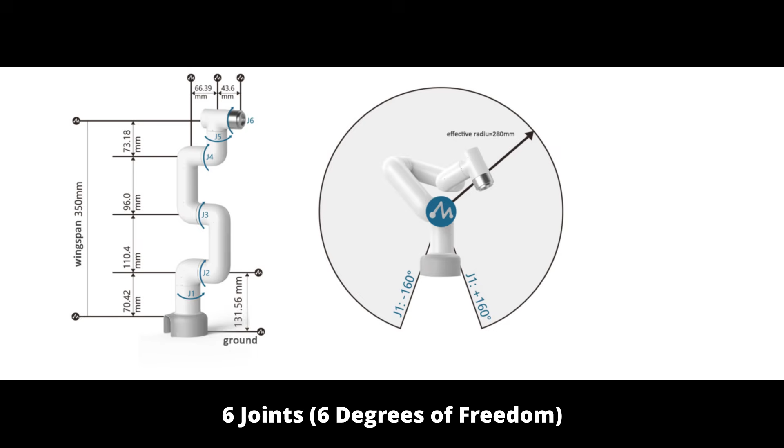So you want to pick up a cup. Here's how ROS2 control makes that happen. Let's look at just a standard example, picking up a cup. So the first stage is your program's command - you want the arm to move to pick up the cup.

Your program, typically in ROS2 that's going to be MoveIt, will calculate the positions of each joint. It'll calculate all the positions each joint needs to move through to get the gripper from the starting location to the goal location around the cup.

Your program then sends what's called a joint trajectory - think of it as a list of positions for each joint, in radians. This joint trajectory gets sent to the joint trajectory controller, which is part of ROS2 control. For example, it might say joint 1 should move from 0 to 45 degrees - I'm using degrees because it's easier to understand than radians - joint 2 should move from 30 degrees to 60 degrees, joint 3 should go from 20 to 10, and so forth.

So that's what happens right here - that's where it all starts. Your program, MoveIt, will calculate all the positions that each joint needs to go through to get the gripper from the starting location to the goal location, which is right where that cup is. That's called the joint trajectory, a list of positions.

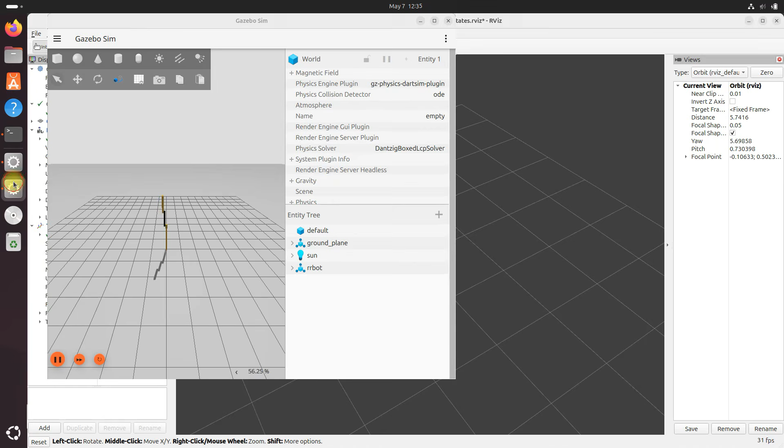Okay, so let's Control C. Let's check out another demo. So let's do ROS2 launch ROS-Gazebo sim demos, and then do joint states.launch.py. Let's press enter. You can see right here another simulation for a very primitive robotic arm. And now when you run each demo, you can see the topics and explore by doing ROS2 topic list. You can see the different topics right there.

All right, let me just show you something. I'm going to open up Firefox. Let's go to Google. I want to show you where you can find some other demos. We'll go to github.com/gazebo sim/ROS_GZ.

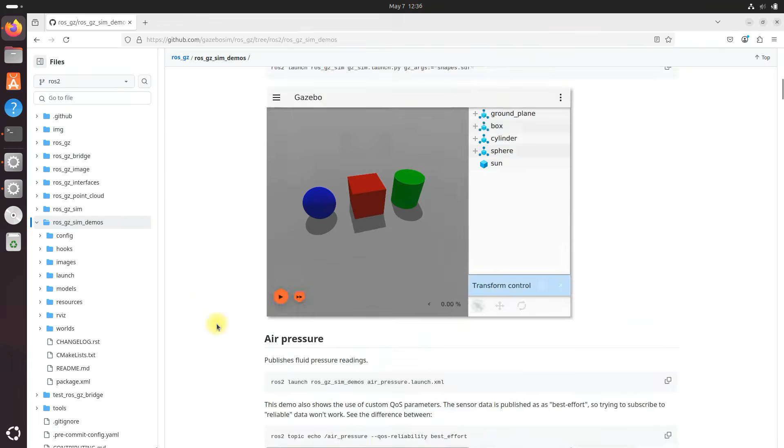Let's go to ROS-Gazebo sim demos. And right here, here's the URL. You can find all the different demos that you can run. Many, many, many different demos. So you're not just limited to the ones that we just did here.

All right, let's close that out. Control C. Let's run a gripper example. We can do ROS2 launch Gz_ROS2 control demos, and do gripper mimic joint example effort.launch.py file. Press enter. Let's see what we get.

Okay, so I see we've got an error in here, but it seems to have loaded just fine. Yep, everything loaded just fine.

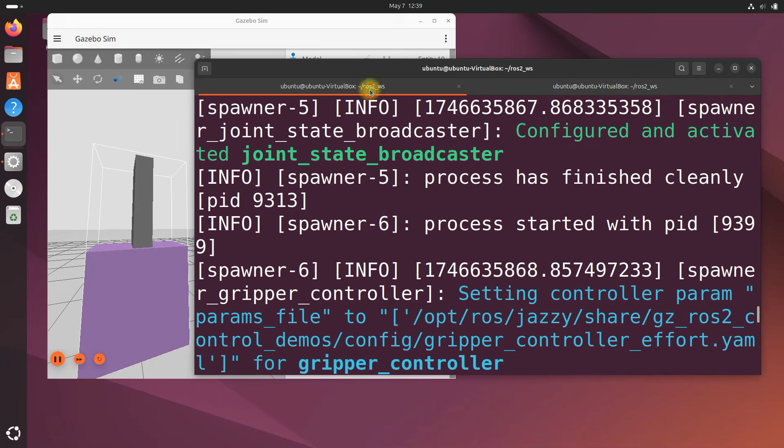Okay, clear. Now let's try the differential drive mobile robot example. So we're going to do ROS2 launch Gz ROS2 control demos, and diff drive example.launch.py. I went by that command really quickly, let's go back so you can see it. So ROS2 launch Gz ROS2 control demos, and then diff drive example.launch.py.

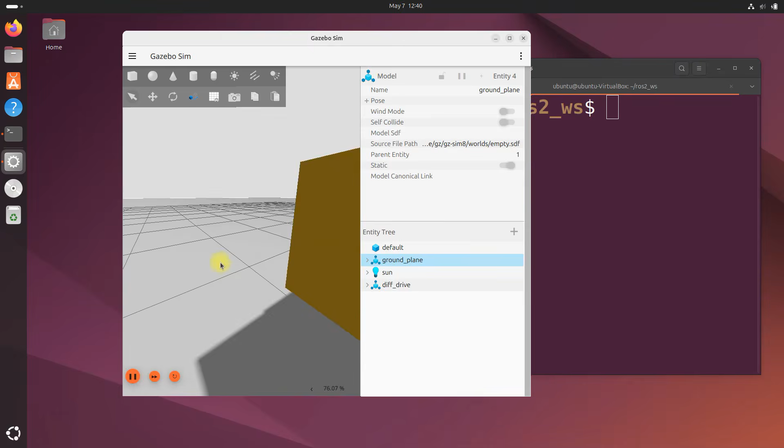Okay, let's clear, I want you to see the robot. There it is, in all its glory. Use the middle mouse button to kind of move around. You can see the two wheels, caster wheel. Looking nice. Let's zoom out a little bit.

Okay, and how about we take a look at the topics. ROS2, let's go over here. ROS2 topic list. So we see that we have this topic right here, diff drive base controller command velocity. That should be where we can actually publish a value to move the robot. Let's just confirm that. ROS2 topic info diff drive base controller.

Okay, so we've got a subscriber, which is definitely our robot, subscribing to velocity commands, twist stamped commands. And we've got no publishers. So let's publish to that so that we can actually move the robot.

Remember, our robot is subscribing to velocity commands of this particular type, geometry message twist stamped, and let's move it around.

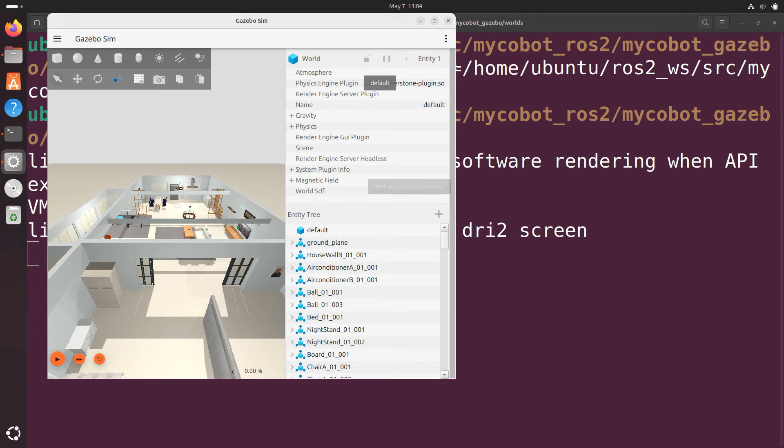So 'gz sim', and then what do we do next? The name of the world, house.world. Take your time, let it come up. And now it is up. Look at that beauty, beautiful house world.

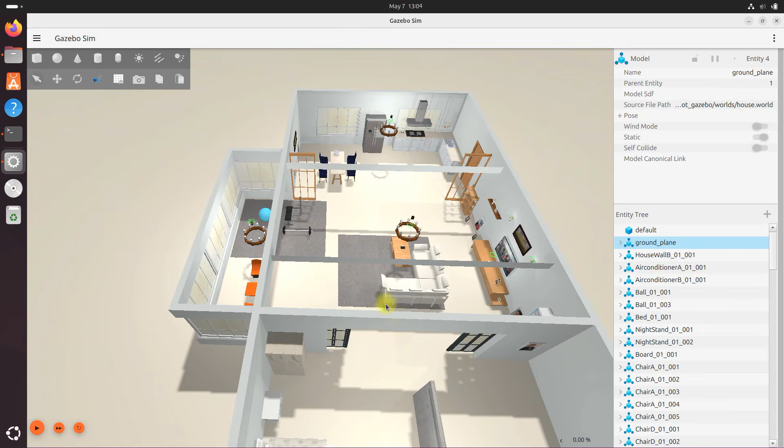Okay, let's expand it out so you can see it. You can see our refrigerator there in the back. We've got our sofa in the house, our chandelier, got a bed over here, pretty nice, some chairs, a medicine ball. Beautiful looking world. Do Control-C.

Close everything, and let's take a look at the other world, the pick and place world. gz sim pick_and_place_demo.world. See if this one loads. Should be much faster, yeah it is. You can see it moves quicker, there's fewer models, a lot more lightweight. Here we've got a red cylinder and different objects, a box, Cheez-It box, Coke can.

There we go. Stuff's kind of flying around. We'll fix that later. Okay, and Control-C.

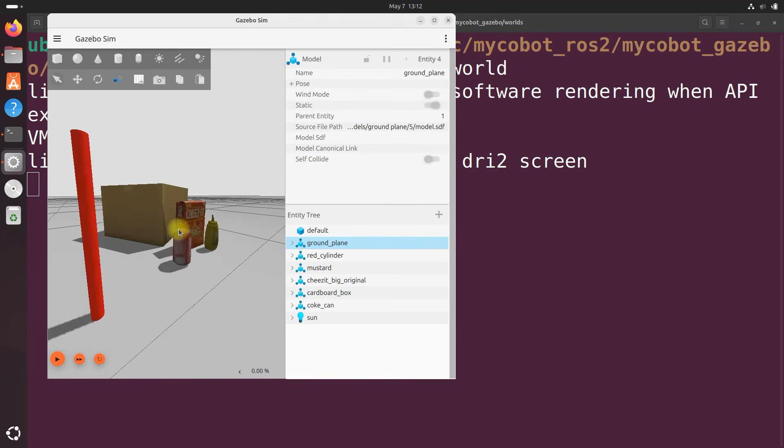Okay, now let's adjust the height. You saw earlier that we had floating objects in the pick and place world, so let's just make a minor adjustment. I fixed it now. You can see everything, rather than floating, is level to the ground. Okay, and how did I do that?

Let's go to the pick_and_place_demo.world file. You can see here this pose: it's X, Y, Z, and then roll, pitch, yaw - rotation around X, rotation around Y, and rotation around Z. If your objects appear to be floating in the world, you adjust this Z value. So I adjusted this downwards. Previously on this Cheez-It box, it was 0.17 for the Z value, I changed it down 6 centimeters to 0.11. For the cardboard box, I lowered it to 0.15 because it was sitting very high and floating in space. And the Coke can, I changed from 0.15 to 0.0.

Save. Okay, now we need to connect Gazebo to ROS2 control. The first step is to create a YAML configuration file for the controller manager. This YAML file will tell ROS2 control how to manage our robot's movement in the virtual world we created in Gazebo. This configuration file will define how our robot's joints should be controlled. Think of it as a bridge between Gazebo and ROS2 control that defines what parts of your robot can move, how they're allowed to move, and how to report back the robot's current state. So let's dive into it, and you'll see what we're going to do as we learn by doing.

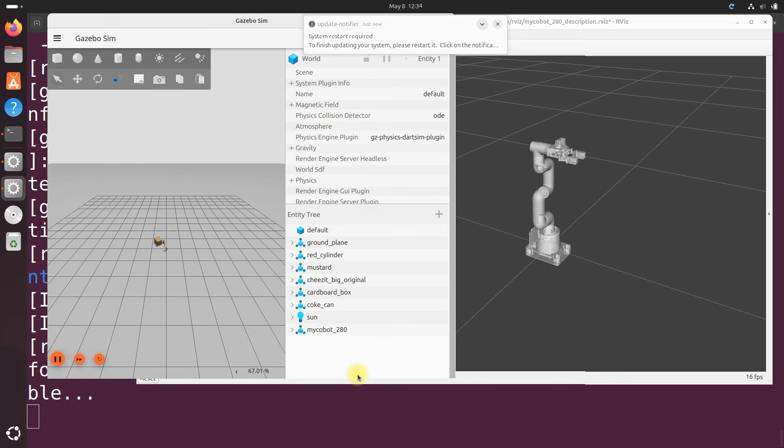Now, for the moment you've been waiting for, time to launch everything and move the arm. Since we've got an alias here called robot that does this entire command and launches this bash script for us, all we need to do is clear - I just like a clean terminal - and let's type robot to launch it all. Be patient while everything loads. Check the logs.

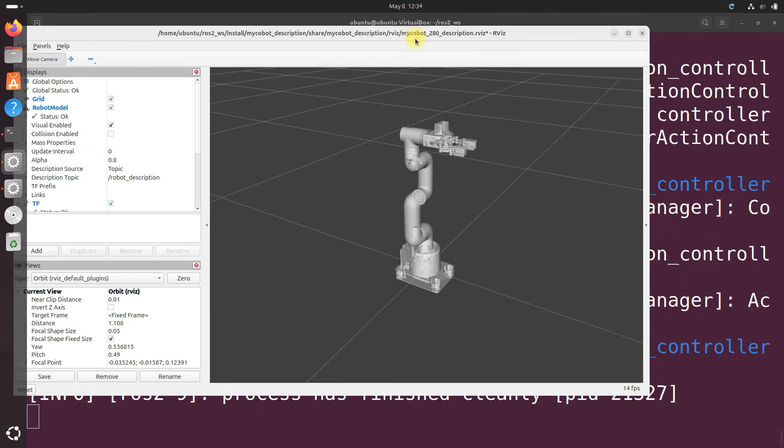Okay, the arm controller loaded successfully and the gripper action controller loaded. That's all we need to be able to control our arm. Let's take a look here at RViz - you can see our robotic arm here. Looking good, looking good, looking good. Very nice.

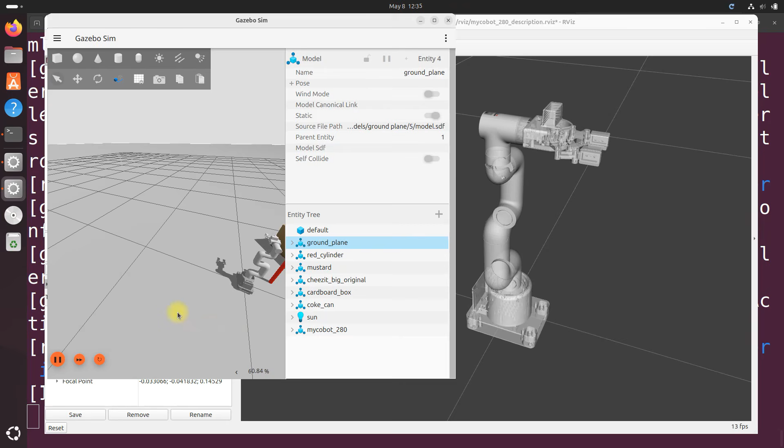Let's go over to Gazebo. Zoom in so you can see it a little bit better. It's moving a bit slow. Okay, and there we go. Let's make that bigger so you can see everything.

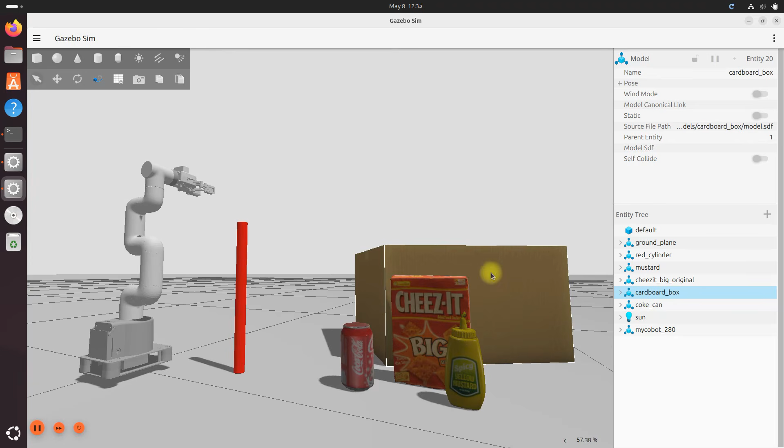Got our Cheez-It box, our mustard container, our Coca-Cola can, our big cardboard box. It's a red pole that'll come into action in future tutorials - we'll be doing pick and place tasks with that. And then we have our robotic arm right here.

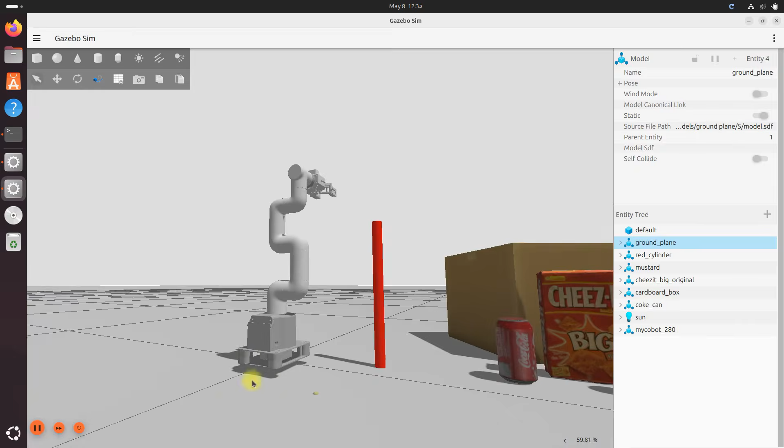I do notice the robotic arm is floating a little bit. We can fix that in the bash script. Let's go over here and see why our robotic arm is floating like that. Let's go have a look.

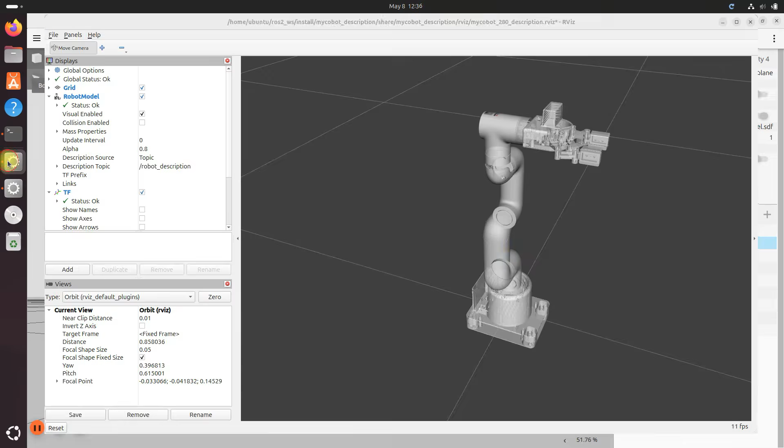Let's go over here to the terminal, open a new one, go to our bash script. So cd source, cd my cobot ROS2, cd my cobot gazebo. Let's go into bring up - cd my cobot bring up, cd scripts, and let's open this up. My cobot 280 gazebo.sh, and let's change this Z value from 0.05 to 0.

Why don't we try that? Let's save it. Okay, let's close everything down - we're going to need to relaunch, build, then relaunch. Let it close, let's do a build. Clear, and let's relaunch, and let's see if our robotic arm has come back down to Earth. Not floating, levitating.

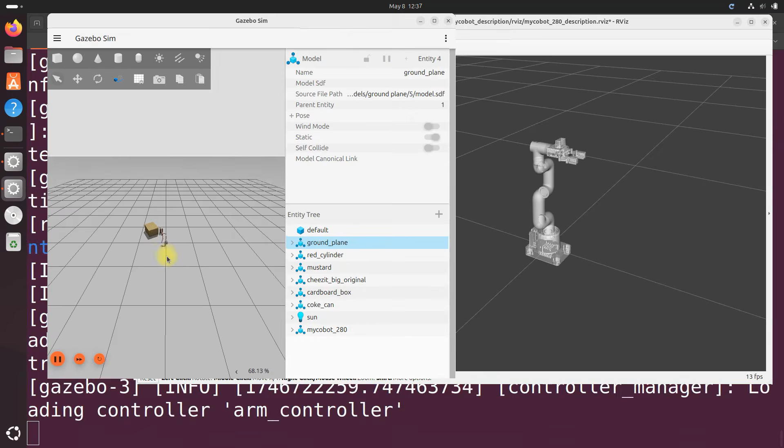Let's check it out, zoom in. Now it's kind of underneath, which is not cool. So now it's kind of in the Earth. Let's try another one, go back to it. Maybe we need to do something like 0.03. Oops.

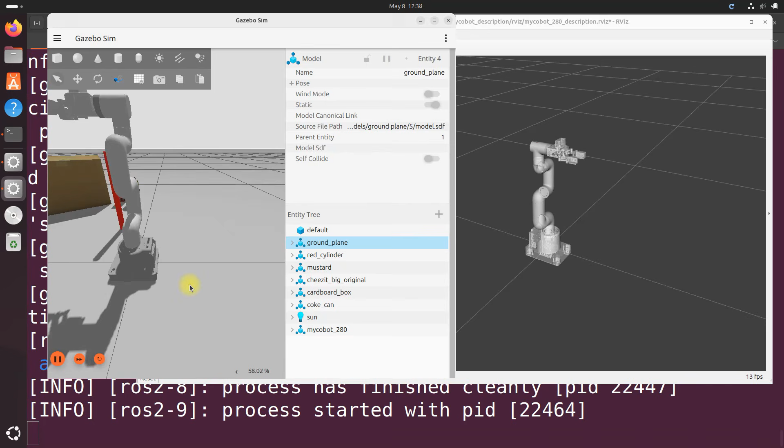Now let's check, zoom in again. It's almost there, let's see. It's pretty good, you can see the base right there. That's a good one, 3 centimeters. Nice and firm in the ground, not levitating. We think we can stick with that.

Yeah, it's a good one. For different environments you might need to change and tweak that Z value a little bit, because different environments, like the house world and other worlds you're working with, might have different ground planes that might be higher or lower. So if it's higher, you want to increase the Z value, the starting Z value on the robotic arm, just like I did in the bash script. But this looks okay. If there's any issues down the road, we'll fix it.

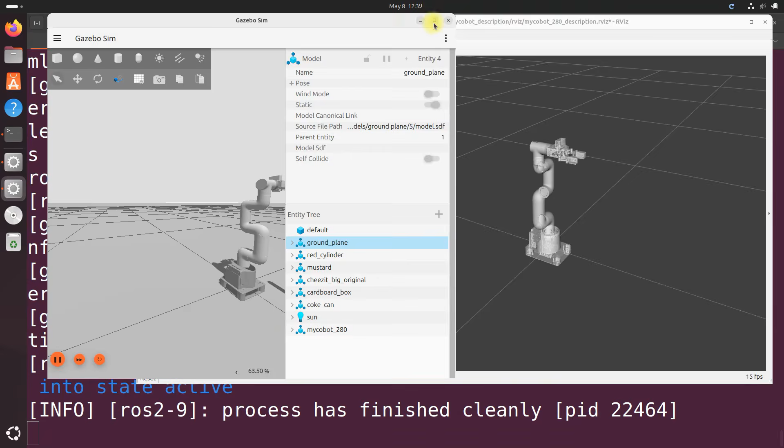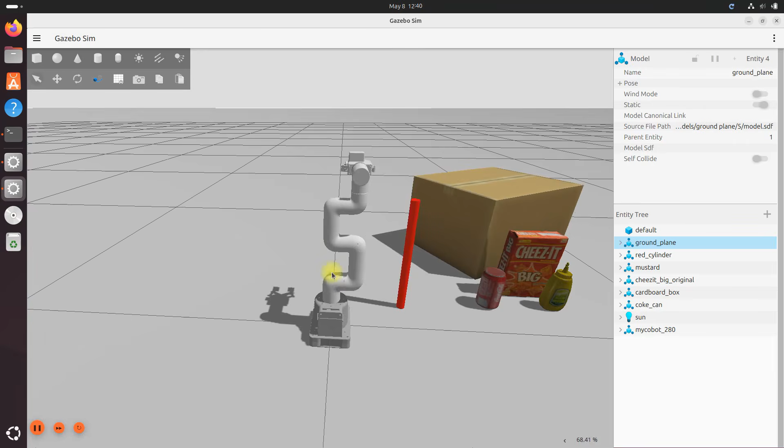Everything looks very nice, let's expand it out so you can see everything, and let's zoom out so you can see the whole world. Use the middle mouse button and twist - that enables you to change the orientation of the scene. You can also zoom in and out using the middle mouse button. Then I use the left mouse button to move position left and right. Middle mouse to change orientation, the rotation in the scene. But that looks pretty good.

All right, let's go into a new terminal. Let's see the active Gazebo topics. Type gz topic space hyphen L. Okay, and that gets us our topics, active topics.

To see the options, Gazebo options, we do gz topic and then help - gz topic, it's 2 hyphens for the help. Okay, and you can see the different options there. See there, help. Okay, let's clear.

Now let's see the active ROS2 controllers. ROS2 control list controllers, enter. And you can see we've got 3 active controllers right there - the gripper action controller, which we defined in that YAML file, and our arm controller, which we also defined in the YAML file, and our joint state broadcaster, which is broadcasting the state of each joint.

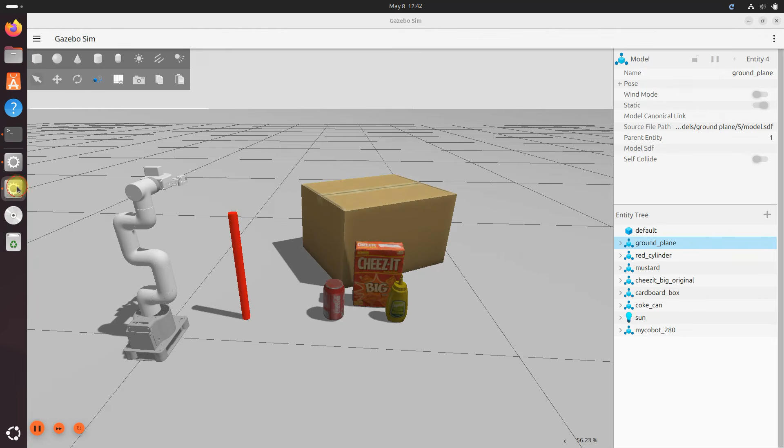All right, now let's go back and take a look at the robotic arm. Let's do a nice little aerial view. And you can see right now how our robotic arm, the gripper, is open. How do we close the gripper? Now, to close the gripper, you're going to go into a terminal window, any terminal window, and type this command.

ROS2 action, let's start from the beginning: ROS2 action send goal, and you're going to do it to the gripper action controller, gripper command, then a control message, a gripper command control message, and then send the actual command. To close the gripper, we have to send -0.7. That's just a hard-coded value, I just know that because that's what closes the gripper, and it's going to be different for different grippers. And here we have our max effort - you don't need to worry about that, just keep it at 5.

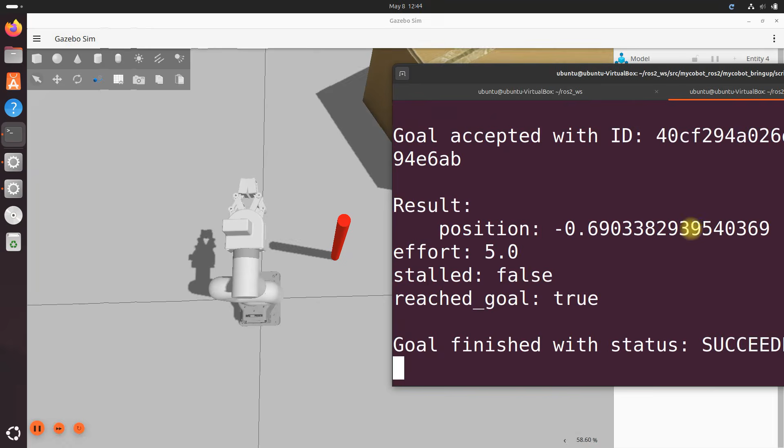Let's see if we can show both at the same time, the terminal and the gripper closing. So I'm going to enter, and you can see the gripper closed. And in the terminal, you can see the goal finished with status succeeded, and the result, we got the resulting gripper position, -0.69, which is the goal position for the gripper.

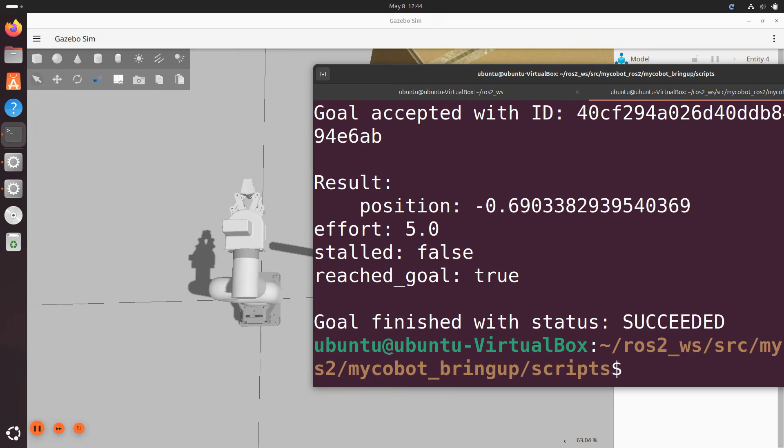And if we want to open the gripper again, we need to send a 0 command. Let's clear. You can see the only thing that changes here is we change that -0.7 to 0 - 0 means open. So I'm going to go over here and click enter. And you can see it opened, wobbled a little bit, but it did open, and it finished with status succeeded.

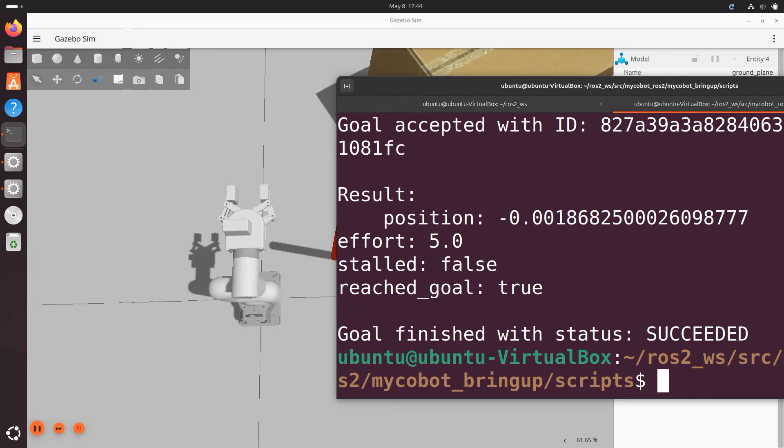Now, how do we deactivate the gripper action controller? Maybe you just want to deactivate it. So we'll do ROS2 control set controller state, then gripper action controller, then inactive. Successfully deactivated the gripper action controller. All right, that's just a command.

If you just want to deactivate it, you can also - let's see, so we'll activate it again. And let's do ROS2 control to see a list of the commands that you can send. All right, clear it.

And what else can I show you? How about we list all the available hardware components that are loaded and ready to be used by the ROS2 controller manager: ros2 control list hardware components. And here we are, these are the different hardware components. In this case it's in Gazebo because we're doing simulation, but these are loaded and ready to be used by the ROS2 controller manager.

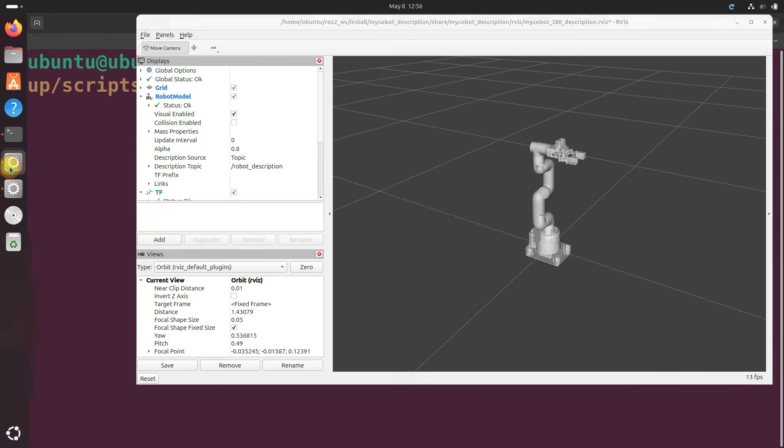So let's get ready to do that now. All right, let's clear, and let's go back here. Everything's good here, just checking - arm is in good shape. Okay let's see, let's type this command to move the arm.

I'm going to show you here. Okay, and this is a command - this is the command, big nasty command. Don't be intimidated. So ros2 action send goal, because we want to send the robotic arm to a goal. We're going to use the arm controller follow joint trajectory action, which you saw earlier when I did the ros2 action list.

Show that again - ros2 action list. We want to use this action to move the arm. Okay, and we want to use this action right here: arm controller follow joint trajectory. By the way, just in case, before we go through all of that, you want to learn right now in case you're curious, no need to do this now but just to show you, let's go to ROS2, I'm going to Google ROS2 action commands.

And let's see what we get here: understanding actions. Right here you got a whole bunch of stuff right here, different commands. ROS2 action list is what we used.

Okay, right there. All right, and let's go over here. So if you go over here we got ros2 action info. Let's go back over there. So ros2 action info, arm controller - okay, and we see that we have a server called arm controller, and that's what we defined, if you remember, in the YAML file. So we have a server, this is serving, this is ready to serve.

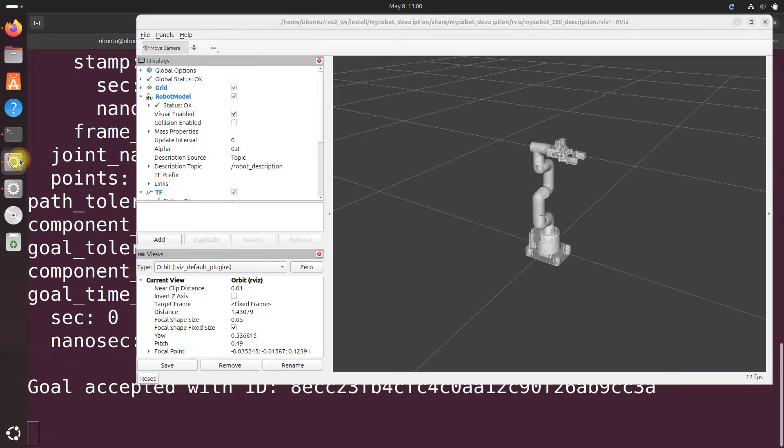Enter. And you can see the robotic arm moving back to the home location. Status succeeded. Clear, go back to the workspace. And clear. Okay, let's close everything out. Control C. Okay, let everything clean up.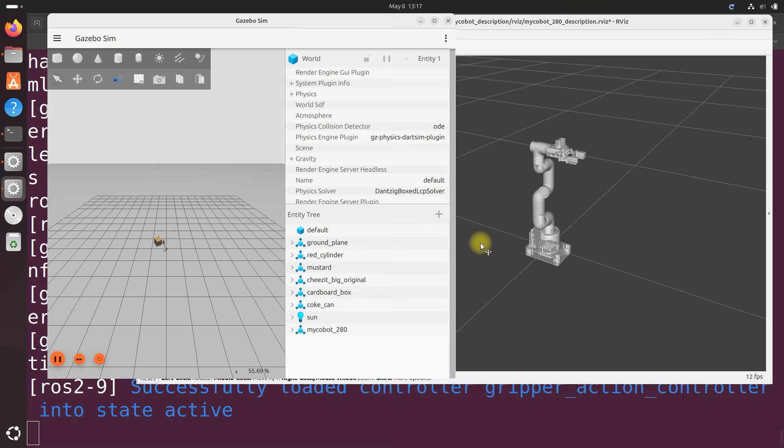Be patient while everything loads up. Okay, the logs have stopped, so we know everything is loaded. Now let's open another terminal and run the node: ROS2 run my cobot system tests, arm gripper loop controller.py. We're connected.

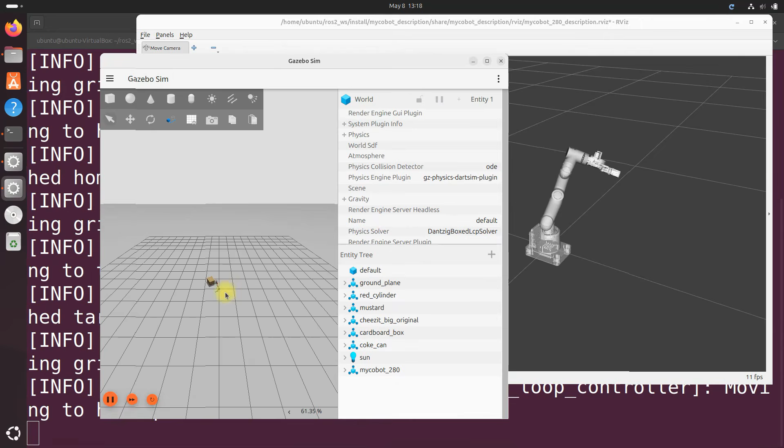Okay, you can see we're going through all the logs: pausing, open gripper, moving target. Let's see if it's actually doing it. And it is. A robotic arm is moving, my friends.

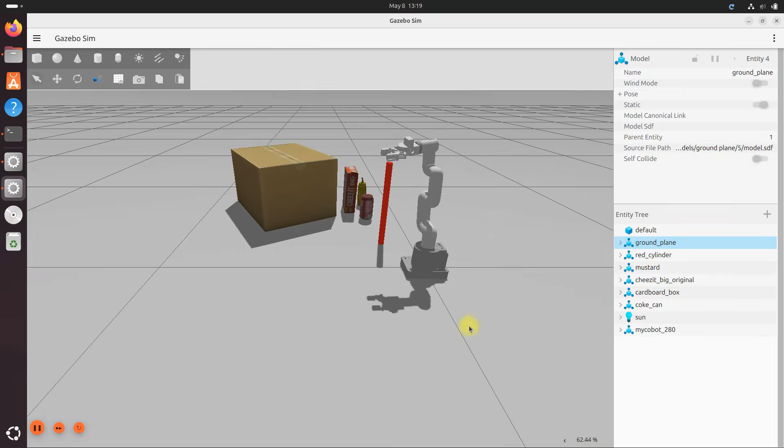Let's expand it out and turn it so we can see. It's doing repetitive motions back and forth: open, pause, close, come back up to the top, open gripper, come back down, close, back and forth. I could watch this all day. Let's go over to RViz and take a look.

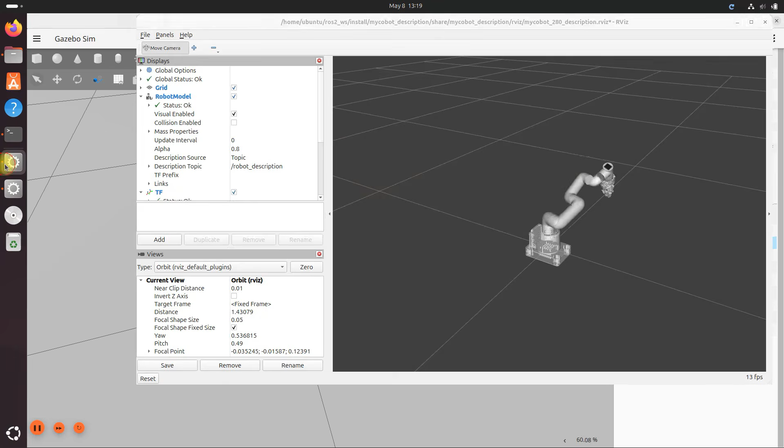Now, when you're done, go over here and press Control C and Control C to close everything down. All right, let's clear that out.

So now let's create the same node in C++, just so you get some experience with that. Let's go over here to SRC, and let's create a program called arm gripper loop controller.cpp.

You're going to go over to the downloads source—here's our code. I'm going to copy all the code from GitHub. Let's close some of this stuff over here. Let's select all, copy, go over to our blank file, paste, and save. I'm just going to close all that out. All right, so this does the same thing, just in C++.

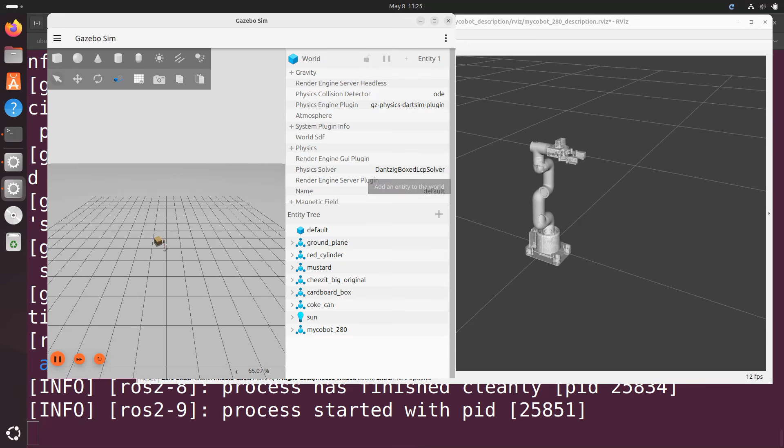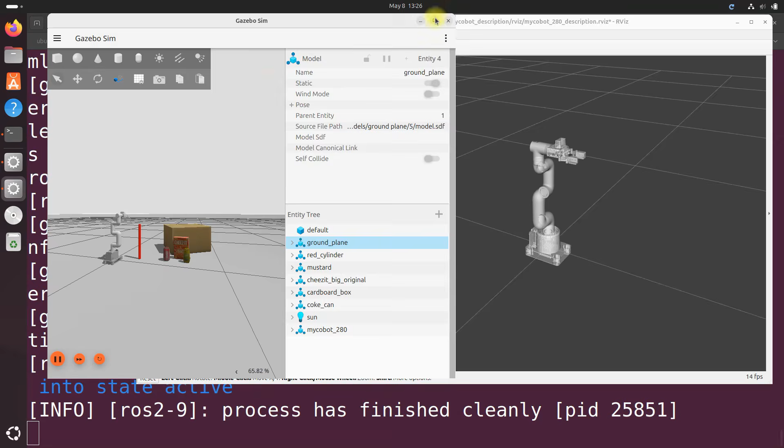It built fine, so now we're ready to actually run. So let's run the robot. Let it come up. Everything stopped. All righty, everything's ready to go. Let's move it over, move it back, let's expand. Oh, zoomed in too much.

Trying to make it nice and good so you can see. Okay, good, so let's open a terminal and run our new C++ code. We're going to do ROS2 run, my cobot system tests, and then arm gripper loop controller. Press enter. Okay, let's see if it's working.

I can see in RViz it's working, doing its repetitive behaviors back and forth. Let's see if it's working in Gazebo. Everything's working, hooray, very nice.

Congratulations, my friend, you made it to the end of this tutorial. You have learned a ton—you have learned how to create everything from scratch, a complete simulated robotic arm in Gazebo from scratch. Thank you for watching, I will see you in the next tutorial. Keep building.